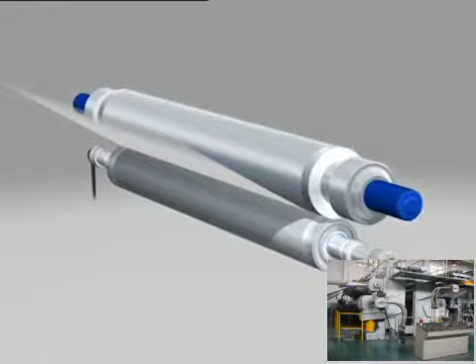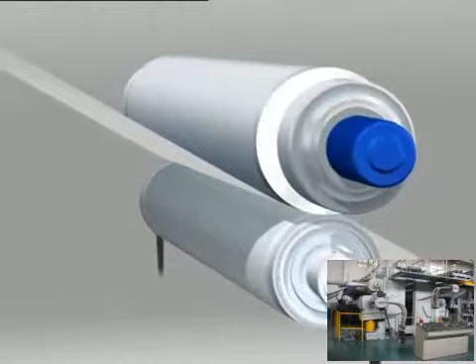Depending on its intended end use, paper must often have a smooth and glossy surface as well as a uniform caliper. These properties are obtained by calendering on the basis of an excellent control of the CD line load distribution in the nips. Nipco rolls effect such optimum CD profiles. This is the reason why Nipco rolls are found in all the cases where a precise adjustment of the CD line load curve is imperative.

That is, in machine calenders, soft calenders, and multi-nip calenders, as well as in comparable applications.

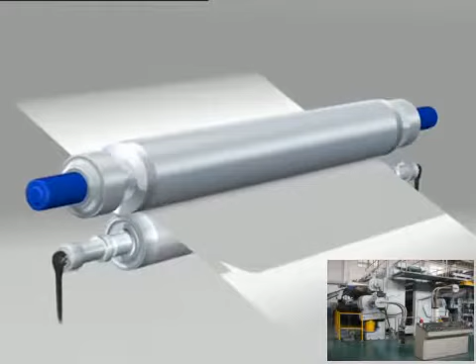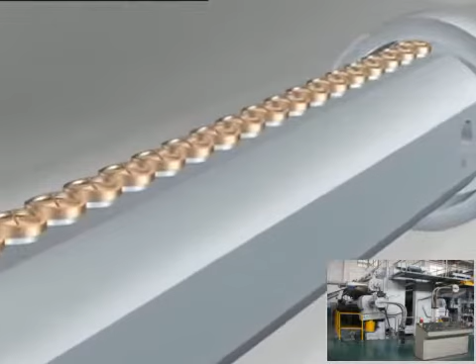With Nipco rolls, hydraulic loading elements arranged in a row on a stationary roll shaft act upon the rotating shell so that the actual profile of the shell can be aligned as desired. These loading elements, which can either be controlled individually or per zone, permit accurate CD profile corrections in the nip. Depending on the technical requirements, the number of zones range from 1 to 60 or more.

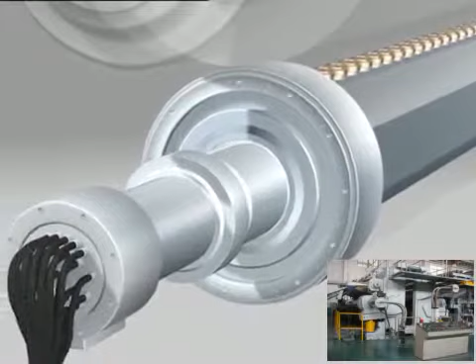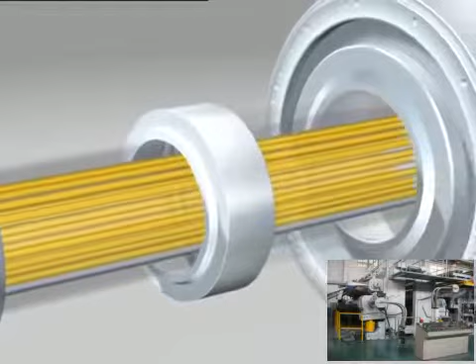The oil is supplied to the loading elements from both ends of the roll via a tube bundle installed in the central bore of the Nipco shaft. The tubes deliver the fluid to the various toroidal oil chambers, which are separated from each other by means of sealing discs. From these chambers, the oil is supplied to the loading elements, thus causing them to move forward and to generate the pressure that is required in the nip.

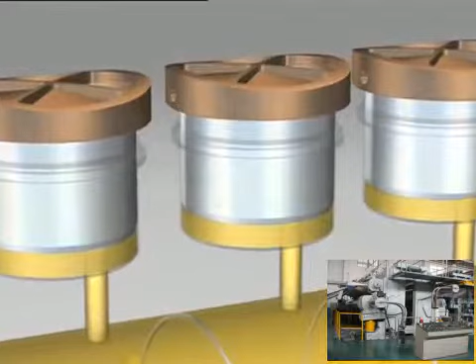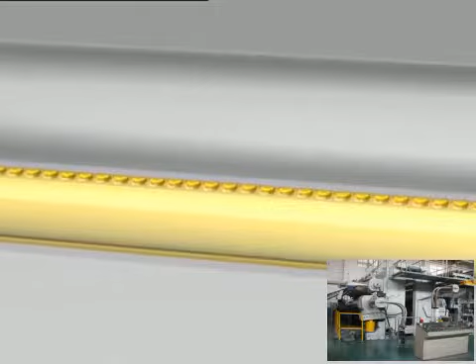Additionally, the oil flows from the pressure chamber beneath the loading element through the capillary ducts to the chambers in the surface of the loading elements, building up an oil film between the loading element and the shell. Due to this film, there is no mechanical friction between the loading elements and the rotating roll shell. Hence, wear is practically excluded. Moreover, the oil film serves as a means for cooling the shell.

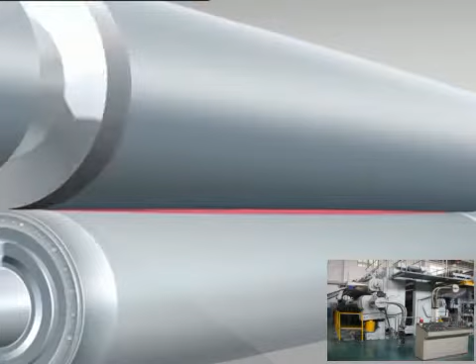Nipco rolls are used for deflection compensation and for profiling purposes. When pressing two rolls together in a press section or a calender, the rolls will deflect and a convex gap will occur between them. For the sake of better understanding, we have exaggerated the deflection here. But even though the deflection is smaller in reality than actually shown, it causes an uneven CD line load distribution, which will lead to an inefficient running and a poor quality product.

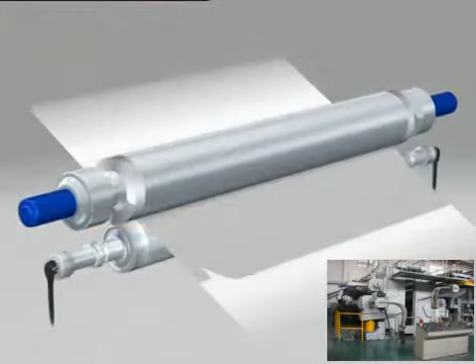The zone-controlled loading elements allow this deflection to be compensated for, thus creating a uniform CD line load in the nips. In addition to this, the individually controlled loading elements allow the CD line load distribution to be exactly adapted as required by the process.

As a matter of fact, it often happens that downstream a press section or a calender, deviations in the paper web occur. These deviations are represented as dark stripes here and require local adjustment of the CD line load. Thanks to an intelligent closed-loop system based on a measuring beam installed behind the nip, such deviations are immediately detected and directly corrected. A regulator changes the oil pressure of the loading element that corresponds to the flaw area of the web.

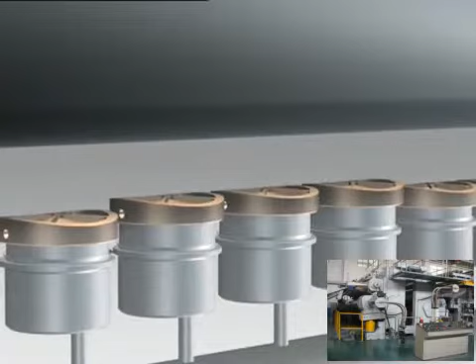Thousandfold proven in practice, Voith Paper's Nipco Reg rolls offer the most modern state-of-the-art technology and combine a high degree of operational reliability with excellent quality and productivity results.